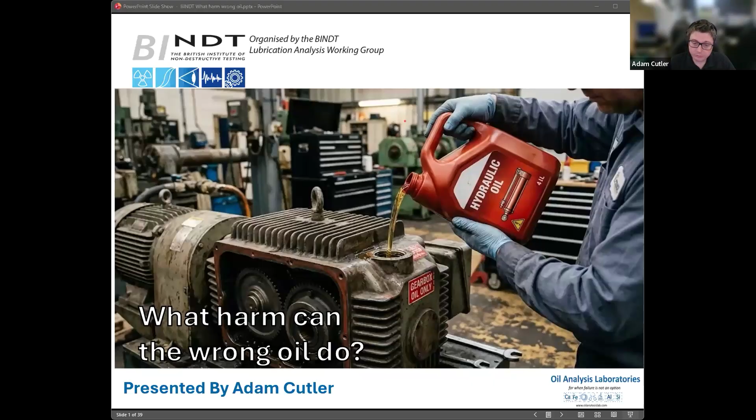Okay, thank you very much, Jade, and thank you for the introduction there. So today I'm going to talk about what harm can the wrong oil do. So first of all, why the topic?

If we think about oil suppliers or lube suppliers globally, you may recognize names such as Shell, ExxonMobil, BP, Castrol, Total, Valvoline, Fuchs, Chevron. All these brands you recognize throughout the industry, and they all have their own market share. This is some estimates of market share based on the litres of oils they sell each year.

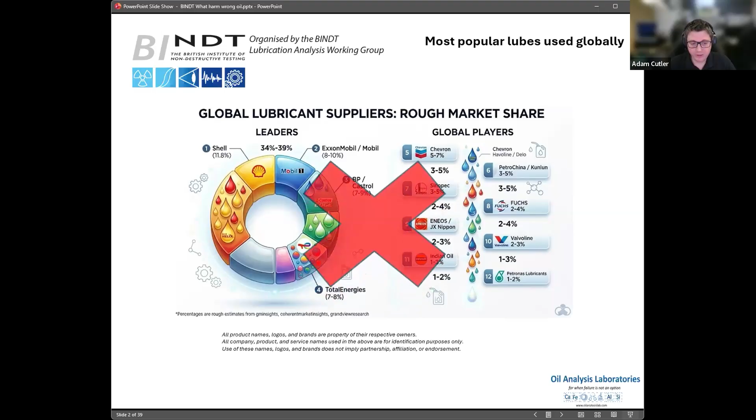But this is based on litres of oils, and this may not be the best way to measure it. In terms of actual customer perception, this information is wrong. The most popular oil in the world sold right now is actually unknown. Most of all the oils, in fact, more than all the others combined, people do not know what actual oil they're using. So many people don't know what oil is in their car or the machinery.

If we expand that a little more, we have what are the most common brands people use. Unknown is number one. Then there's, I think it's Shell, I think it's Castrol, I think it's synthetic, or it could be a mix. So it's a mix of one, topped up with another. Not knowing the right oil is actually a real problem in the industry.

Let's talk a little bit about the function of a lubricant. The most obvious one people think of is it reduces friction, separating the surfaces and allowing the components to move past each other. We also think of it as preventing wear—obviously you don't want things to wear. It can also dissipate heat. We also want it to prevent corrosion—if we get water into the system, we want it to remove it and prevent it from causing corrosion to components.

It can also clean. Now, this can be through additives, so detergents, but also physically just transporting the oil to a filter that does the cleanup job. As well, an overlooked feature is the ability to seal. If you take an engine, for instance, the piston rings are often thought as sealing, but it's actually that little tiny layer of oil beyond the piston rings, between that and the cylinder liner, that does the final seal to prevent leakage of combustion gases.

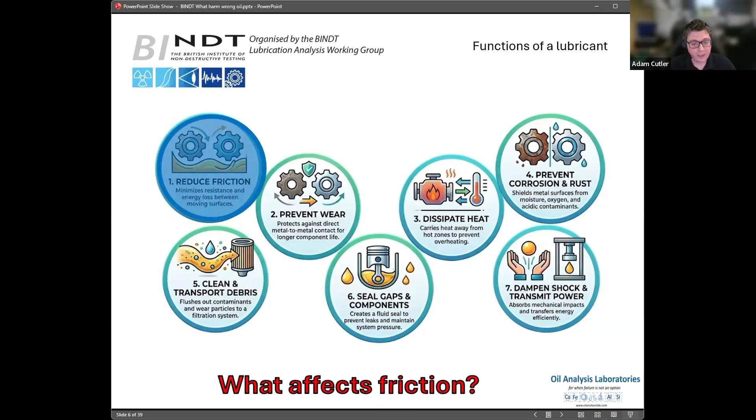So what affects friction? Well, there's a few factors, but one of the key ones is the viscosity. Viscosity is resistance to flow, but in layman's terms, it's how thick an oil is. We can see here, on the left-hand side we've got a very thin oil, and on the right-hand side a very thick oil. Obviously it has more resistance pouring from one container to the other, so it pours more slowly when it's a thicker oil.

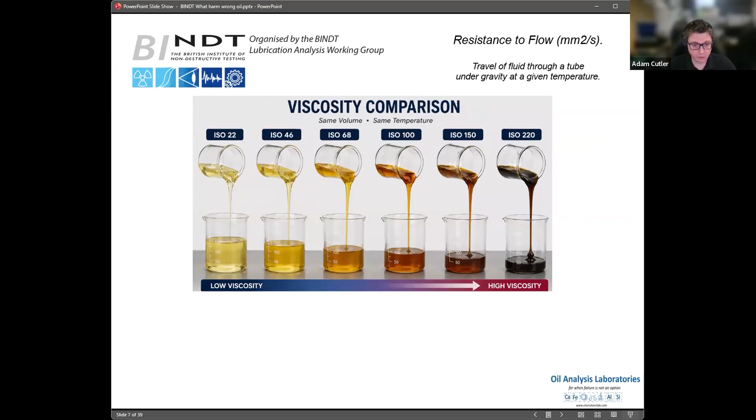So how do we measure viscosity? There are several ways of measuring viscosity, but a common way is kinematic viscosity, where you have an oil-filled bath and under gravity drop the oil down one end of a viscometer tube. It reaches the final point at the bottom under controlled temperature, and we know by the time it takes to get from one point to the other how thick the oil is.

So if we take this bath here, on the left-hand side I've got three tubes highlighted. If we put some oil down each of these tubes, you can see that this one on the right-hand side has actually hit the bottom before the first one, although that started first, has actually reached it and it's now finished. The reason for that is a much thicker oil has more resistance to flow, and so takes longer despite starting earlier.

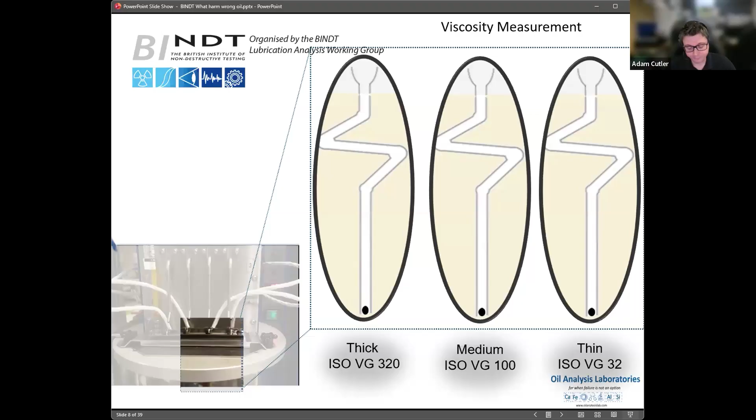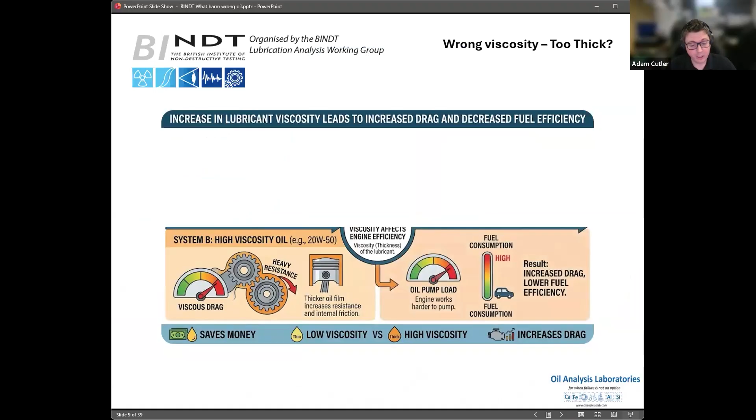So what happens when an oil is too thick? If you think of something like an engine, trying to move components through a very viscous oil is going to give a lot of resistance and drag. That's going to lead to increased pump load and lower fuel efficiency. Whereas a thinner oil has less drag, so it's easier to flow and easier to pump around, giving better fuel economy. That's why a lot of modern formulation oils tend to be thinner, because it gives less drag and better fuel economy as a result.

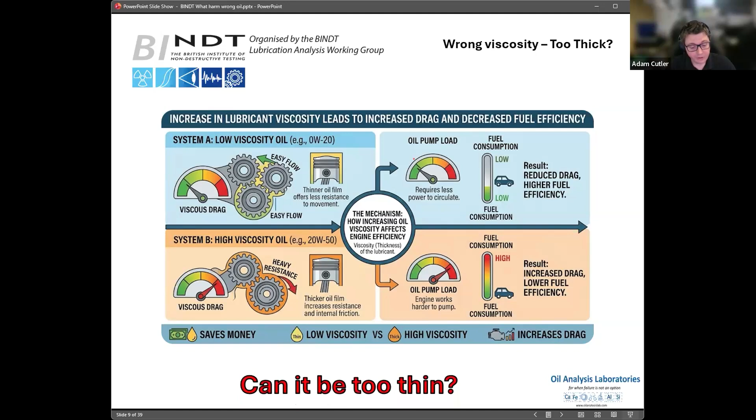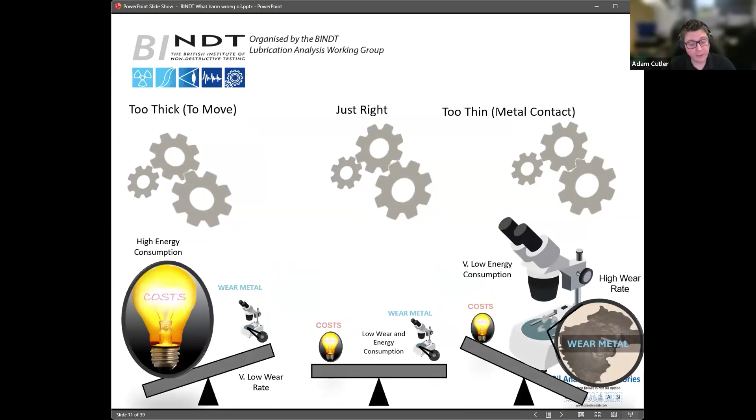But can it be too thin? This brings us into our next area, which is preventing wear. A too-thick oil, as I highlighted before, gives high energy consumption but a really good film thickness. In contrast, if something is too thin, you get better fuel economy, at least at the start, but more risk of metal-to-metal contact. So you don't want an oil that is too thick or too thin. You want this Goldilocks zone of something just right, thick enough to give surface separation, but not too thick that it leads to increased drag and energy consumption.

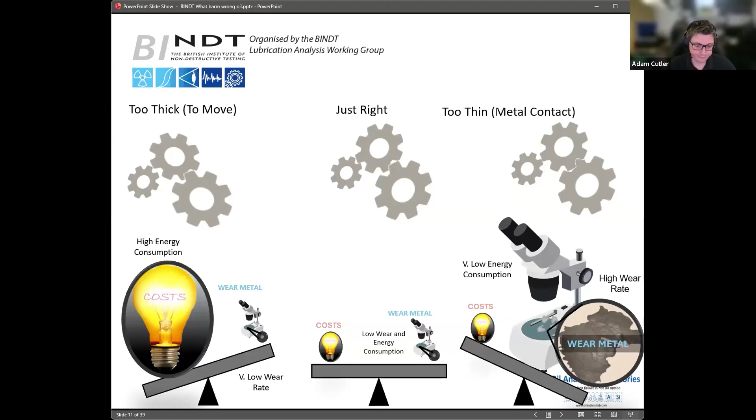So what happens to the film thickness? If we take a brand new component, like a plain bearing, as the surfaces move past one another we think of them as perfectly smooth, and they look perfectly smooth to the naked eye. But at a microscopic level they have surface imperfections called asperities, giving little peaks and valleys as the surfaces move past one another. You can imagine these will bump into each other as we move them, and we get materials break off. These then deposit and react with lubricant additives, forming what's called a shear mix layer, or boundary lubrication.

Under normal circumstances, you have the full fluid thickness, with the oil separating the components. Under reasonable load, but not overloading, the actual surfaces can come into contact just through the additives themselves. But if you take this too far, you can get metal-to-metal contact, which is abnormal wear. So boundary lubrication is typically normal wear, but if you overwhelm that, you get abnormal wear.

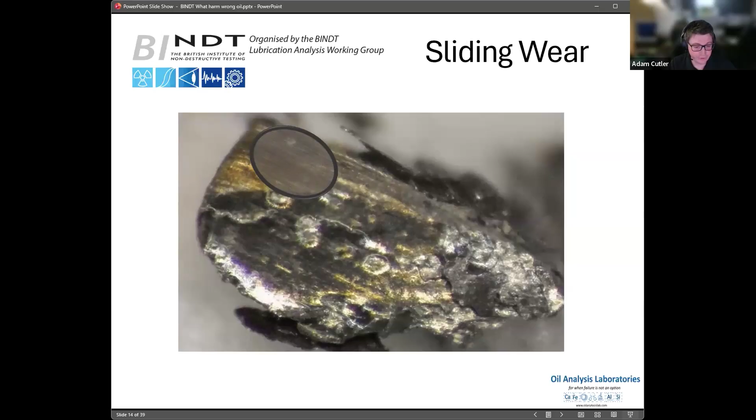If you get to abnormal wear from metal-to-metal contact, this leads to sliding wear. You can see on this particle here we've got almost like a grain to the material, called striations, which are significant in a sliding wear contact like I just showed. So if we have our normal system with a full fluid thickness, versus one with too thin a film thickness, we can have boundary lubrication touching and then going beyond, actually breaking through to metal contact. This leads to increased wear in the system.

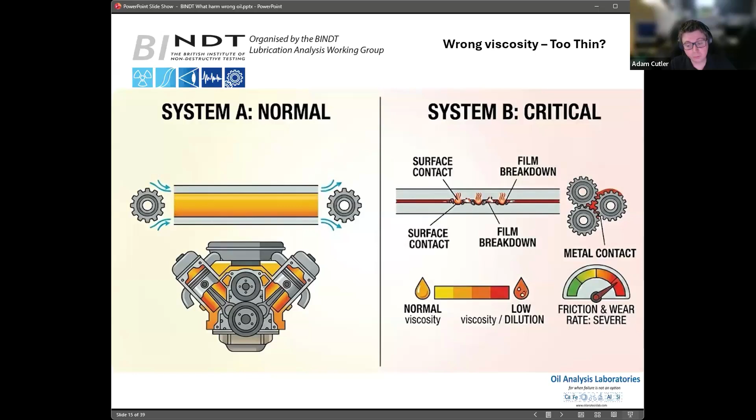I've already pointed out that viscosity affects the first two functions of a lubricant, and that's because viscosity is the most important property of a lubricant. So much so, I'm going to talk about it again now. We talk about dissipating heat, and we talk about viscosity index.

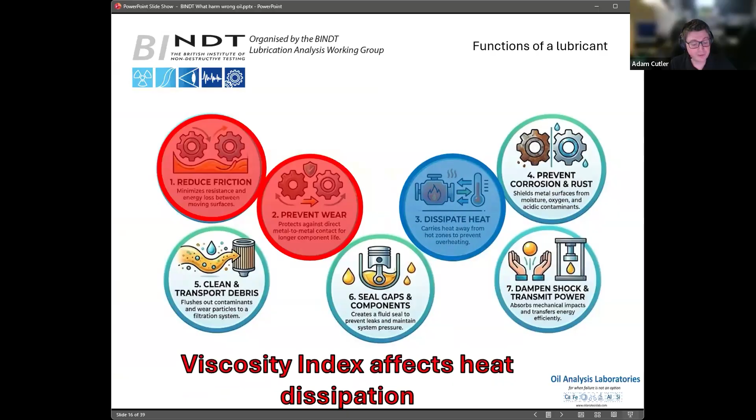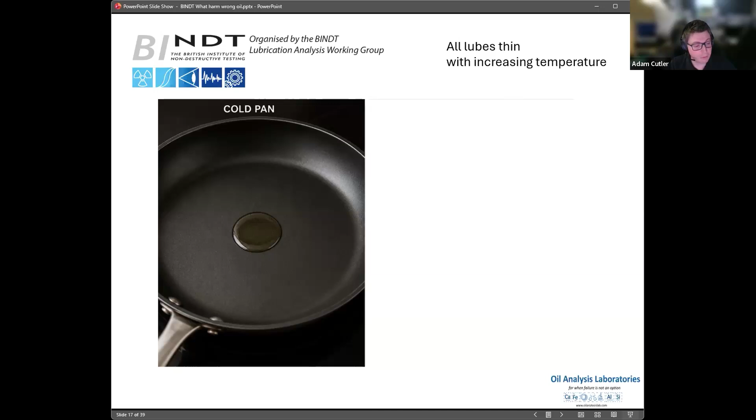I described earlier when we talked about viscosity that we have a temperature controlled bath. That's because all oils thin with increasing temperature. Take a classic example, like when I'm cooking: if I've got a cold pan and I put a blob of oil in it, when I heat it, that oil spreads out across the pan. That's because it's reduced in viscosity and so has less resistance to flow, so it flows around the pan much easier.

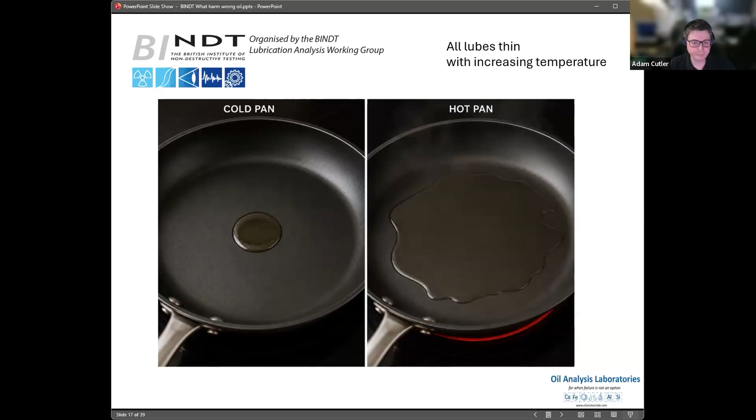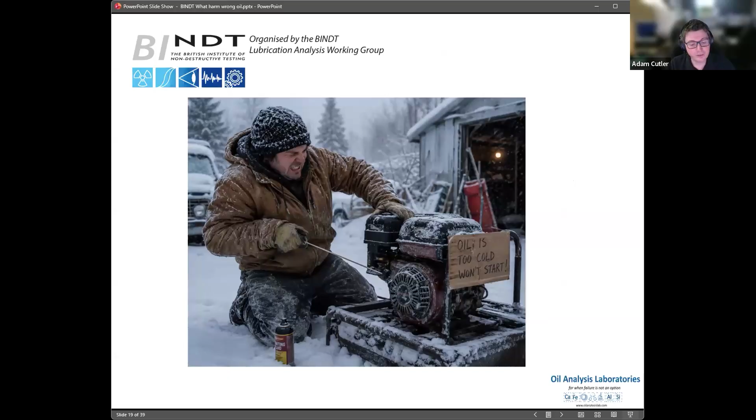So who will this suit? Someone who's working in these cold conditions, trying to start the engine—they want this to be as close to this perfect line as possible because they want it not to get too thick at colder temperatures.

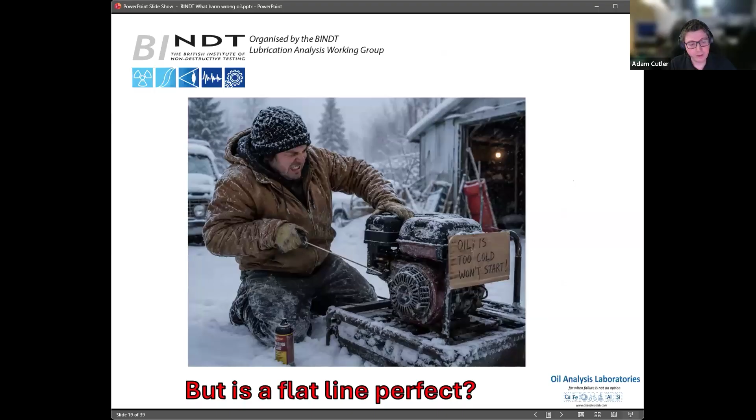But this doesn't necessarily suit everyone. If we take an oil that's being used to transfer heat away from a component, you actually want it, as soon as it heats up, to get very thin very fast so it can flow away to allow fresh cool oil to go and cool down the component. So a very low viscosity index would be desirable in those circumstances, as opposed to the high viscosity index when you want good temperature stability.

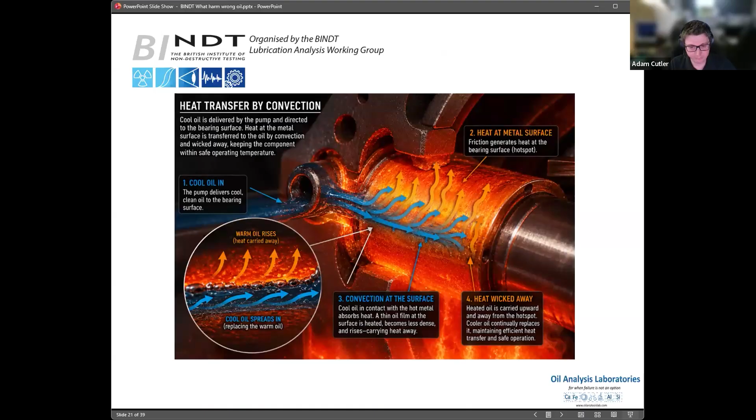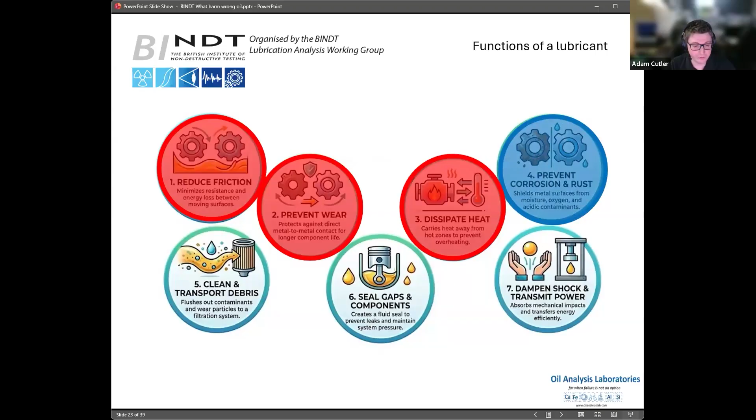So another thing you may be thinking of—isn't the oil being oxidized from the heat here? This is where we come on to prevention of rust, corrosion, and oxidation. All lubricants contain anti-rust and antioxidant additives, called an R&O additive package. So all oils contain these in their lubricant formulations—it's part of the basic oil formulation.

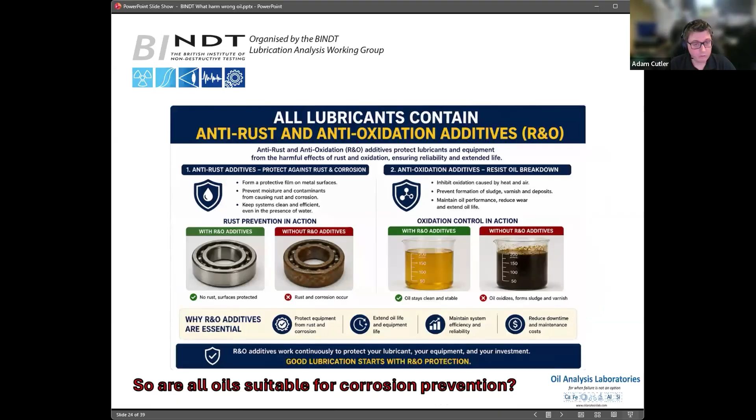So you could argue, are all oils suitable for corrosion prevention? Well, it depends. If we take something like an ester—there's several types—some key properties: a phosphate ester has good fire resistance. A biodegradable ester, by the name, is biodegradable, so has good environmental credentials, but they're also good solvents, and they tend to have very high viscosity indexes as well. So all these could be desirable properties.

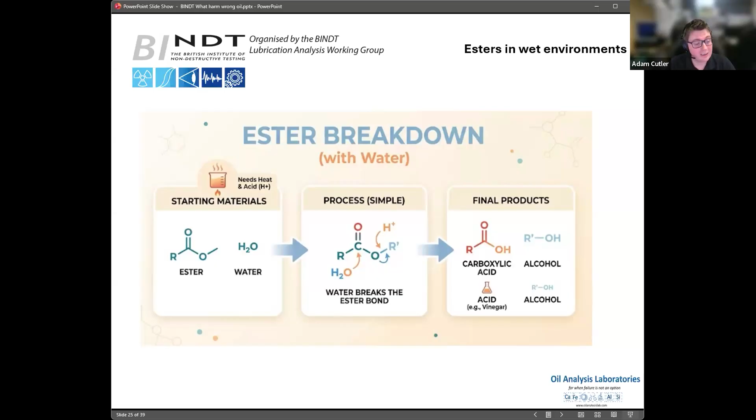They'll all have rust and antioxidant additives in their additive package, but esters are made from acid plus alcohol equals ester plus water. We can reverse that reaction—if we add water, we can split the ester back into an acid, and that acid can cause corrosion. So a wet environment is not the ideal circumstance to use an ester-based lubricant.

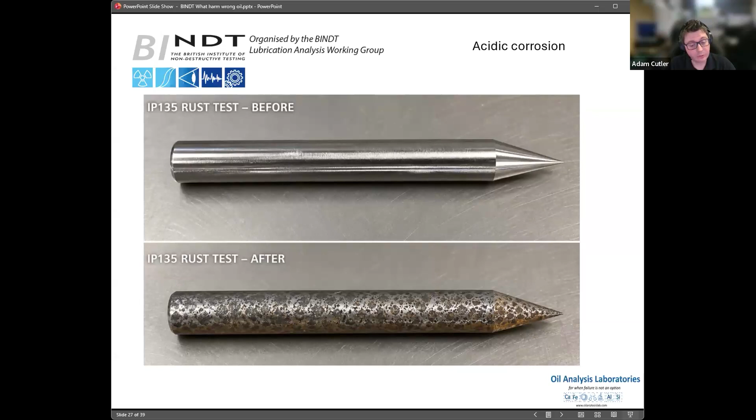So is it just the base oil and antioxidants causing issues? Well, no, it can also be other additives. A common one is EP, extreme pressure oil additive, used in many gear oils, which gives that sulfury, unpleasant smell you can smell in gear oils. These are really good for wear protection, but one disadvantage is that EP can attack copper components, and this can eventually lead to copper sulfide formation and, over a very long period of time, tarnishing and dissolving of components in a gearbox.

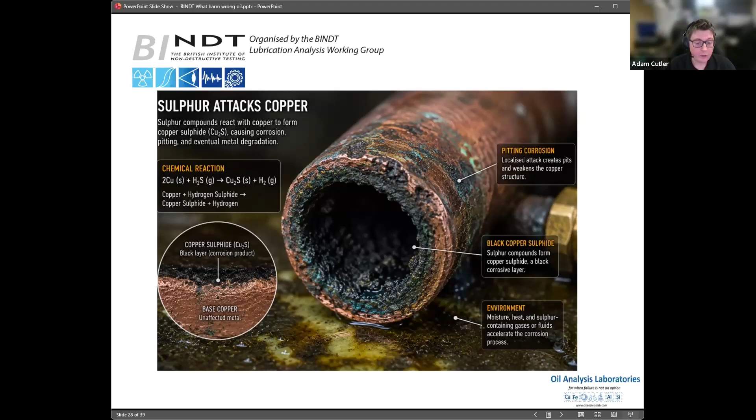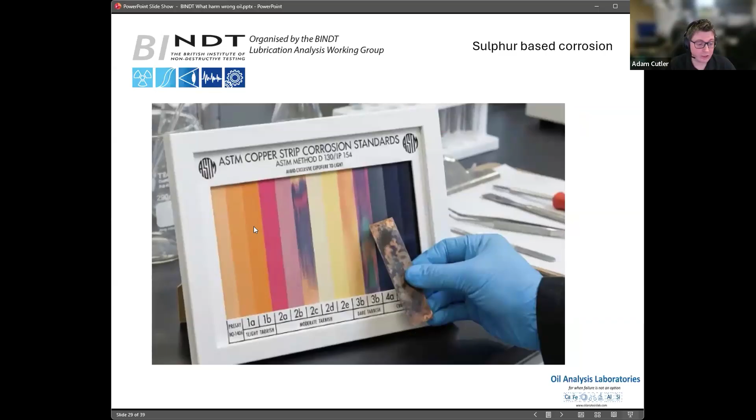The way we measure this in the lab is we do a copper corrosion test. We simulate that environment and take a copper test strip to see how much it tarnishes. You can see this specimen here is actually not looking too healthy compared to, on the left-hand side, what a nice, fresh, healthy specimen should look like.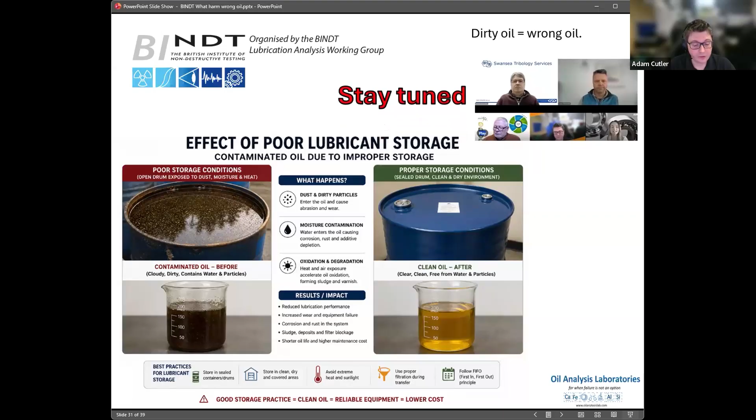The function of a lubricant also includes cleaning and transporting debris. So the thing I want you to get from this is that dirty oil is the wrong oil. If the oil is dirty, this is not the right oil for you. I'm not going to go too much into this because the last presentation will be from Dimitri, so you've got something to look forward to about contamination effects. Stay tuned for that presentation.

Lubricants are also required to seal, as I mentioned before. A common issue is when switching from one brand or type of oil to another in large lubricated systems, you can get shrinkage or swelling of seals, which leads to them not sitting right in the housing and causing small leaks throughout the system. This is one of the things to check when switching in very large oil and lubrication systems - actually check for seal compatibility.

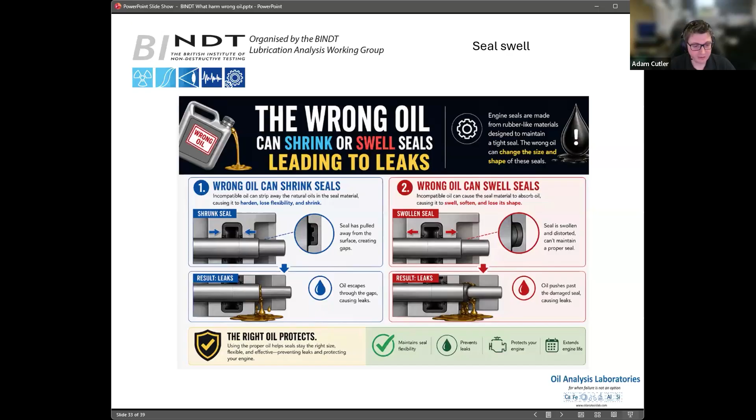Some of the ways you can do this is you can measure an aniline point. You can measure inherently the aromaticity of the products, and this will give an indication of how well and how compatible the oils will be.

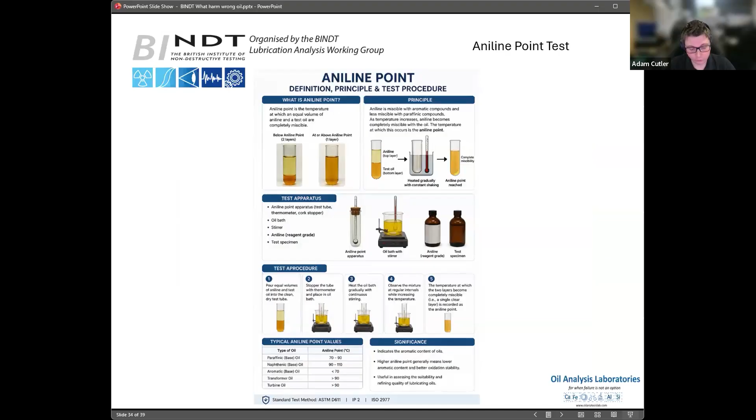You can also do direct specimen testing. You can take one of the seals, take the old oil and the new oil, and see what the swell effects would be on that specimen.

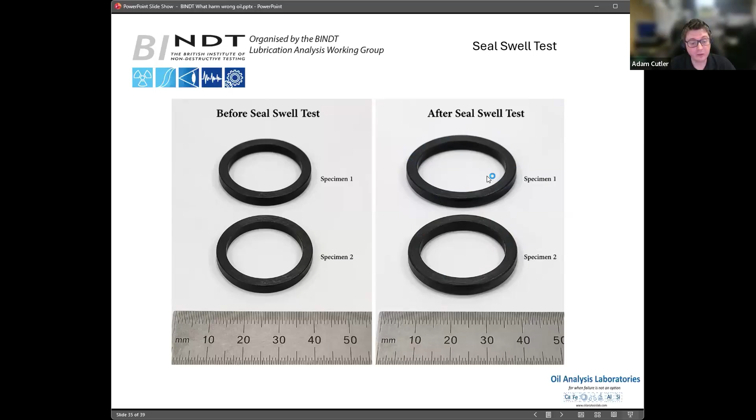We can see here we've got two equally sized specimens. Now this one you can see is very slightly bigger than this one at the bottom, so you can see this one has actually swollen a little bit more. If we wanted it to be like this one, they would have gaps here because we're not getting enough swell. Or vice versa, if this is what the alternative product is, it could overswell and lead again to disruption of the seal.

We also want to dampen shock and transmit power. If any of you have ever put your foot on the brakes and it's not gone too well, this can be down to air in the brakes. Obviously that's a safety issue, but this also happens in anything involving hydraulic power.

Air is obviously compressible. Foam in a lubricant or high air release tendency in a lubricant can lead to uncontrolled movements, which can cause safety issues because it's uncontrolled. But also over time, because air is compressible, that air gets superheated, and over time that heated air will burn the oil around it and form little soot particles. This is a process called microdieseling - the oil actually starts to soot over time.

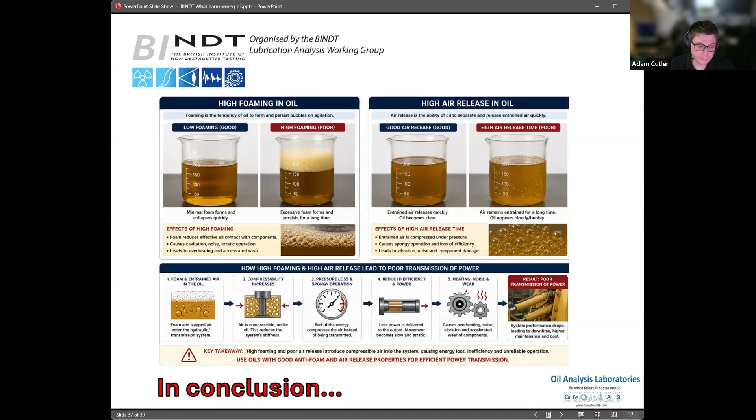In conclusion, what I would like you to get from this is that oil analysis assesses all these parameters and looks at all these aspects of whether you've got the right oil for the right purpose. It will look at viscosity, looking at whether you've got the right film thickness. It will look at elemental analysis to see if you're getting wear and whether you've got the right additive pack there. It will look at infrared to see if you've got the right type of lubricant.

It will look at viscosity index to see whether the oil is working over different temperature ranges at the correct amount. It will also measure how spent a lubricant's additive is and how much resistance a new lubricant will have to depletion. It will also look at corrosion, air handling, and water handling properties - all these properties can be found out from a single oil sample.